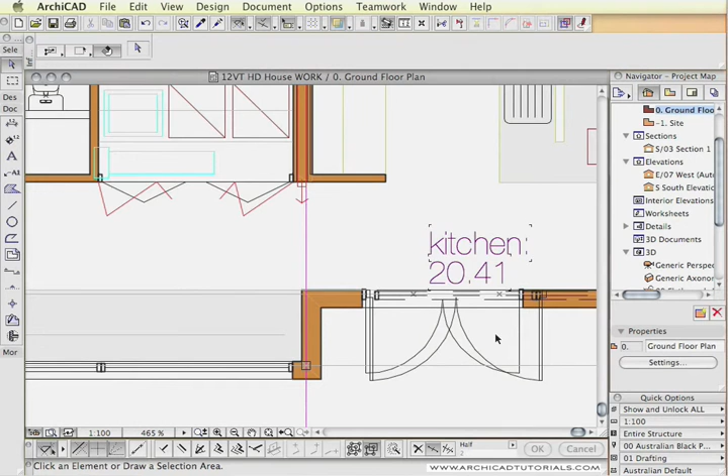Okay, well here we've got an ArchiCAD project with an AutoCAD XREF in it. It's the XREF that we looked at before, and by now we've done a little bit of ArchiCAD work done to it. Basically the walls have been traced with ArchiCAD walls, doors have been inserted, the plan's been rationalised a little bit, doors, windows, but it's not finished by no means. So I've got this sort of simple skeleton of a project.

Now we're basically going to have a look at a particular method you might employ to work with an XREF, because obviously you're not going to want to see your XREF all the time in our ArchiCAD project. So first thing we have to do is make sure that we can see the AutoCAD stuff easily and the ArchiCAD easily. So to do that we're going to go to the organizer and start playing around with the views, arranging things in terms of the display so it suits our methods of working.

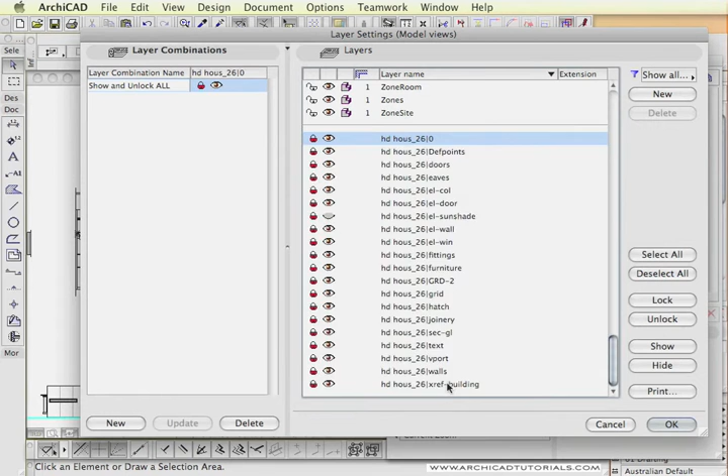So at this point I'm going to click on Control or Apple L and open the layers palette, and we're going to create a couple of new layer combinations. First of all, I'm going to select all the AutoCAD layers, which are pretty easily distinguished because they're underneath that line in the layers palette, and we can see that they are all AutoCAD layers, and there is another movie on this DVD that talks about this, so I'm not going to go over that.

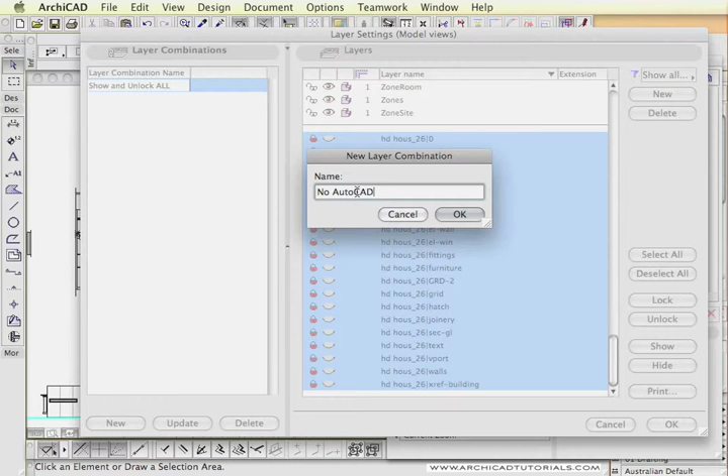And then I'm going to click on New and create the new layer combination, which is going to be called No AutoCAD. Now this is by no means a call to arms or anything, it's just a name. So now we can see that there is no AutoCAD overlay on our ArchiCAD plans there. Then I'm going to drag that view across to the right hand side and call it No Overlay.

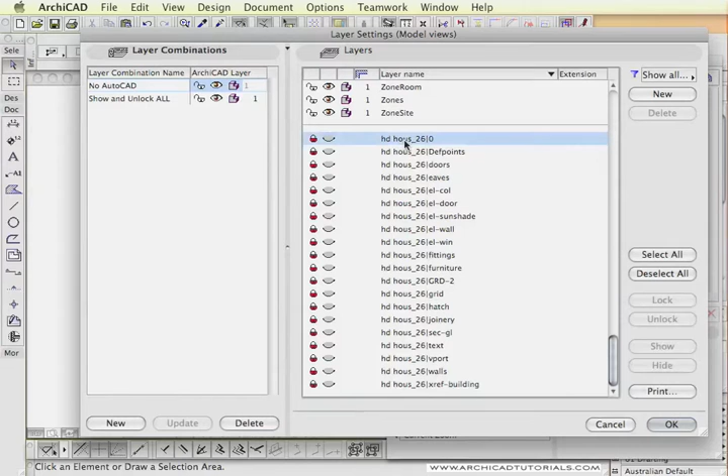Then I'm going to go back to the layers palette, and this time I'm going to do the opposite. I'm going to select all the AutoCAD layers. In fact, I'm just going to click on Show and Unlock All, and I'm going to select all the ArchiCAD layers, hide them, and create a new layer combination. And we're going to call this combination Overlay Only. So that's going to be just our AutoCAD layers showing, and I'm going to drag that view over to the right hand side again, and of course I'm going to call this Overlay Only.

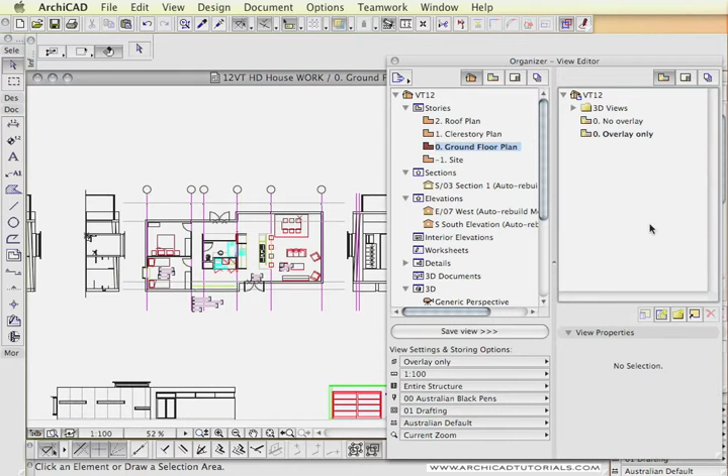Now obviously what this is going to allow us to do is toggle between the AutoCAD stuff and the ArchiCAD stuff. Now on top of that, what we can do is set the opposite view as an overlay or a trace reference. So by right mouse clicking on it, we can say choose as underlay, and then as you can see, we can see the underlay underneath our ArchiCAD project.

Now I'm going to open the trace and reference palette, and here I can change the colors there so we can see it a little bit better. Now you can see the AutoCAD stuff or the AutoCAD layers in orange, and that is there just as an overlay, so we can't select it accidentally, and the overlay can be changed considerably. We can choose different colors, it can be faded out, and we can also use the virtual tracing paper and pull a slider back, and then we can see the XREF underneath and peel back the ArchiCAD model to see how we're going.

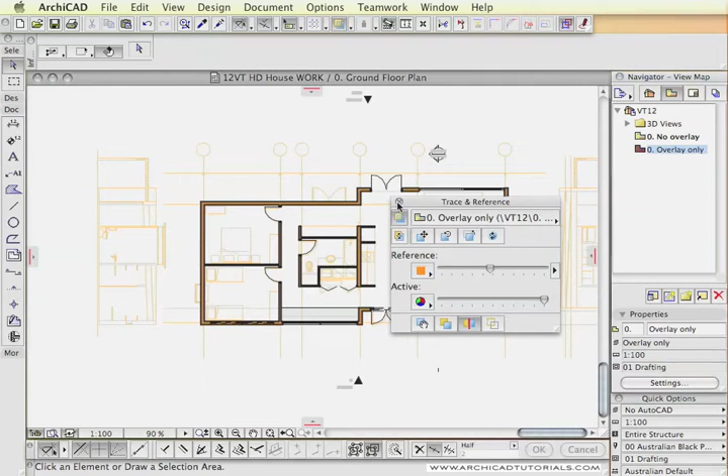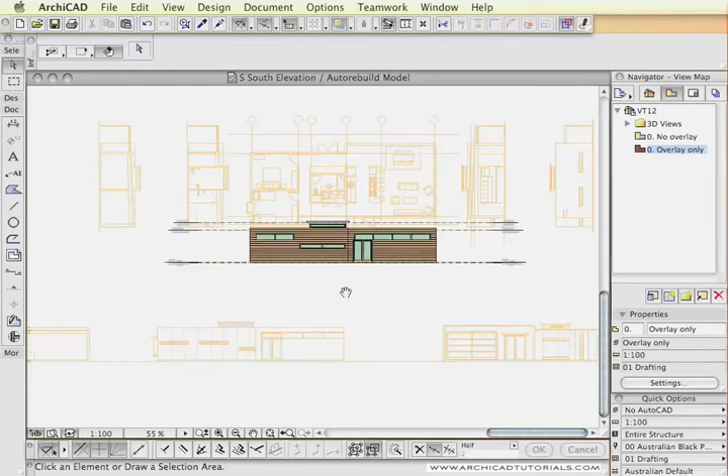In the same way, if I start working in one of the elevations, let's just say I open the south elevation, we can also choose the reference, or I could say define the view as overlay only, and we can show that as a trace reference. In this case we would probably try and line up the trace reference with our ArchiCAD project. So I'm just going to use the palette and select a hotspot and line it up with the hotspot on the ArchiCAD drawing, and there's our overlay.

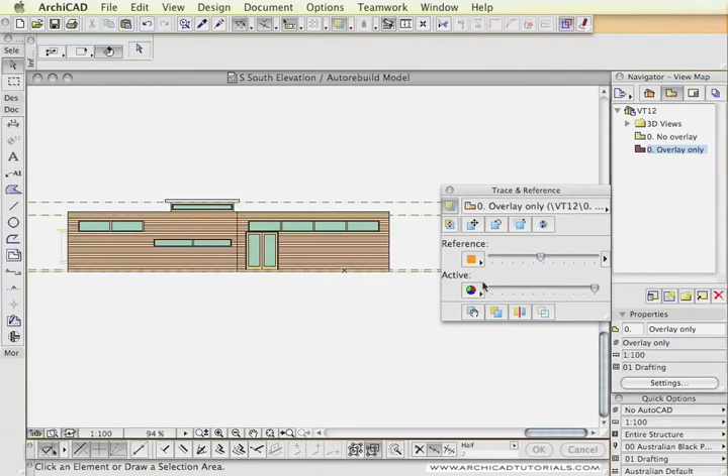And I might change the color a little bit here and bring the overlay on top. So once again we can see the differences that we've made and how well we're following the AutoCAD stuff. Now in each of these elevations the overlay sits in a different position, and also the rotation will be a little bit different as we move on to the side elevations of the building.

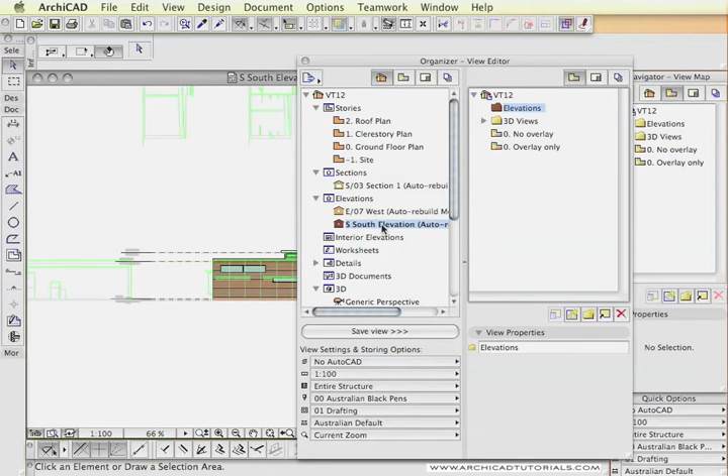We probably want to start saving those as views. So I'm going to open the organizer and I'm going to start saving those. So I'm going to click a new folder, call them elevations. Then I'm just going to drag that south elevation into the elevations folder.

It's important to remember that in our saved views on the right hand side of our organizer, it will actually remember everything about the view. So in this example we've got the elevation and the overlay set in front of the model and it's green, and when we click on the ground floor we can see the overlay is orange and behind it. These are all remembered in the view editor, and it certainly makes our job easier.

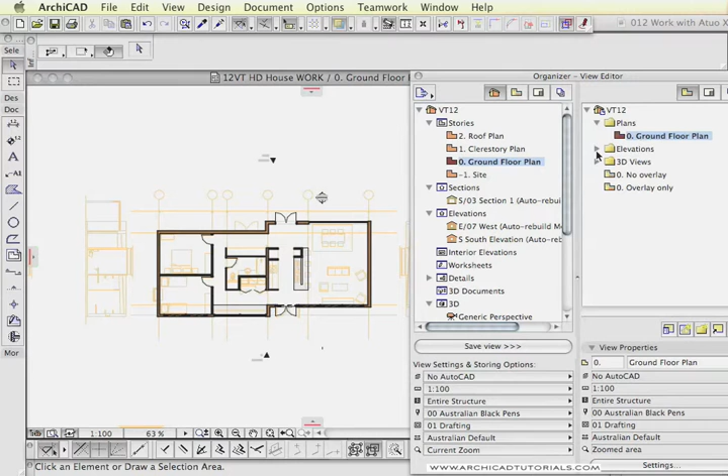I'm going to create another folder and call it plans, and drag that ground floor plan into there so it also remembers the settings for that ground floor view for later. Then as I click on this button I can turn the overlays on and off, so there's another option.

The next thing we're going to do is look at another elevation, because the elevation as it's brought in from AutoCAD is actually drawn all on one page, so all the elevations are along a straight line and some of them may be upside down. The elevations in this example are sideways, so we need to rotate the overlay so it lines up with our model.

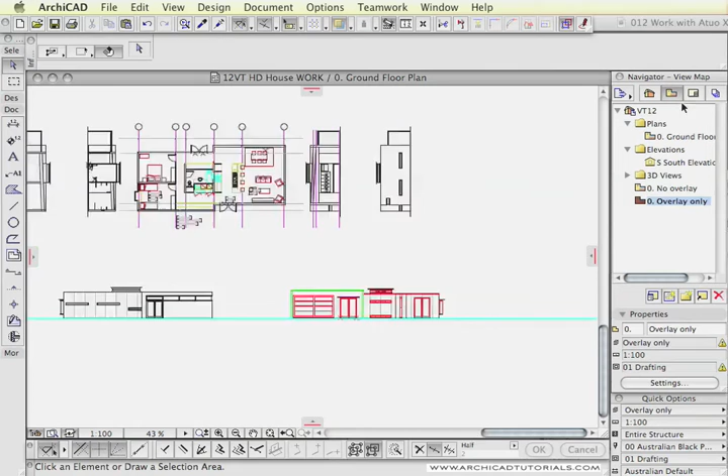Now we're going to go back to the navigator and choose a different elevation. I'm going to choose the west elevation, then go up to the saved views, click on the overlay only, right mouse click on it, and click show trace reference. Now that the overlay is showing underneath, we can see how it's oriented incorrectly and we need to fix that up.

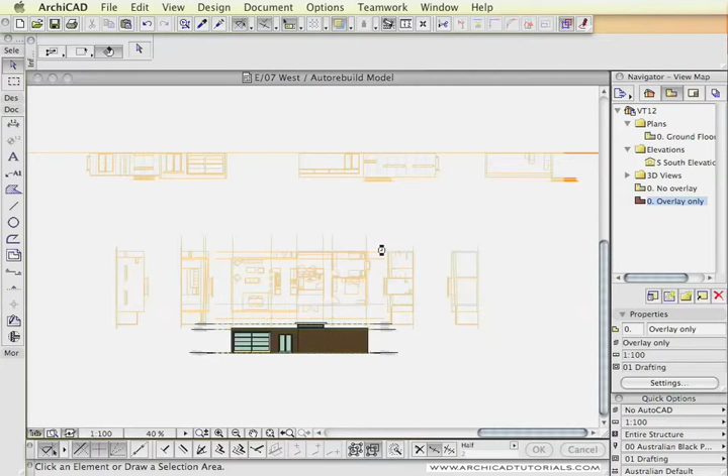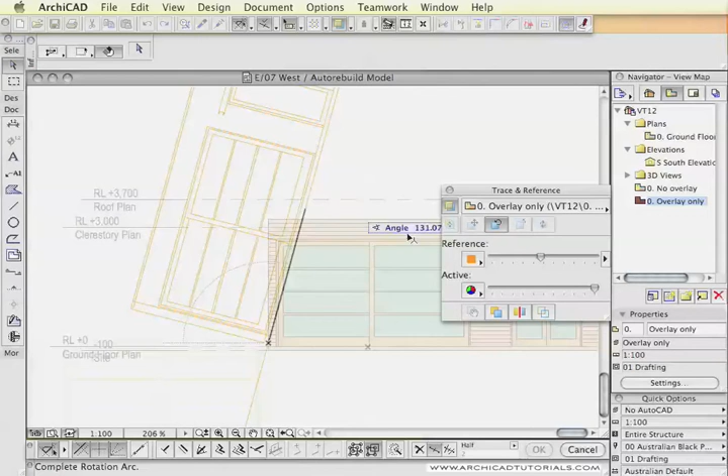To rotate it, go up to the trace reference palette, open it up, and check this icon here. I'm going to drag it to the right point first, in other words line it up with the bottom of our model, and then I need to rotate it. Click on this icon, zoom back in, select it, hold the shift key down, rotate it around 90 degrees holding shift, and then I just need to move it a little bit more.

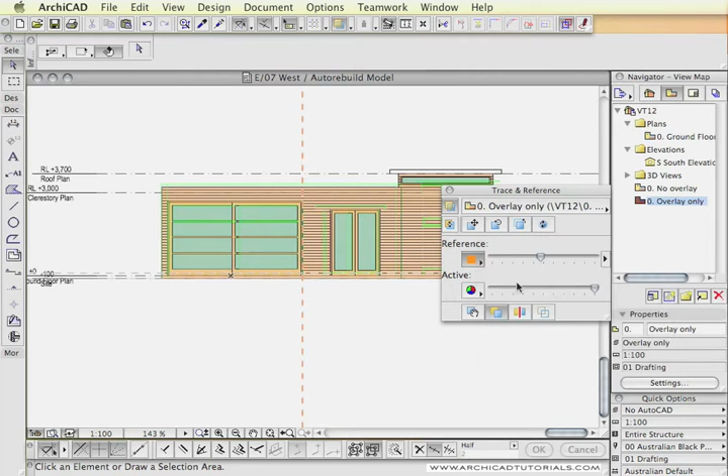Click on that, line it up. When it ticks there, I can click again and it should be in the right spot. Then again I'm going to change the position of the overlay by checking this button, and change the color of it once again, make it green, and increase the intensity so it's in front. So once again it's easy to see how far our model is different from the AutoCAD XREF.

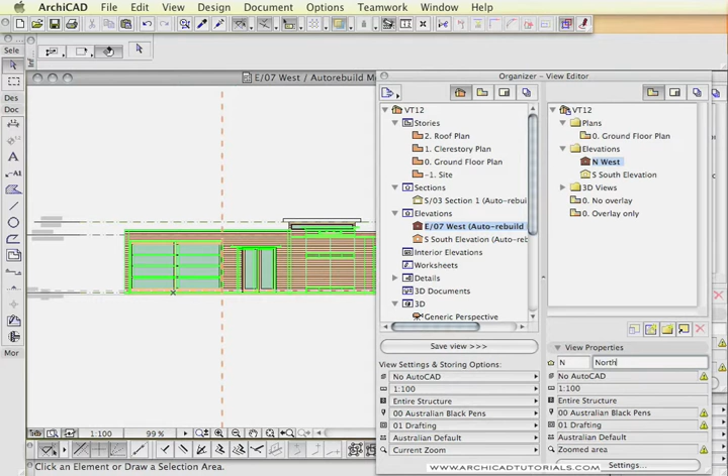Once again I'm going to save that view by dragging it over into our elevations folder, and I'm going to call this the north elevation. Now this elevation obviously has a fair bit of work to do on it, but at least we know how to work with it.

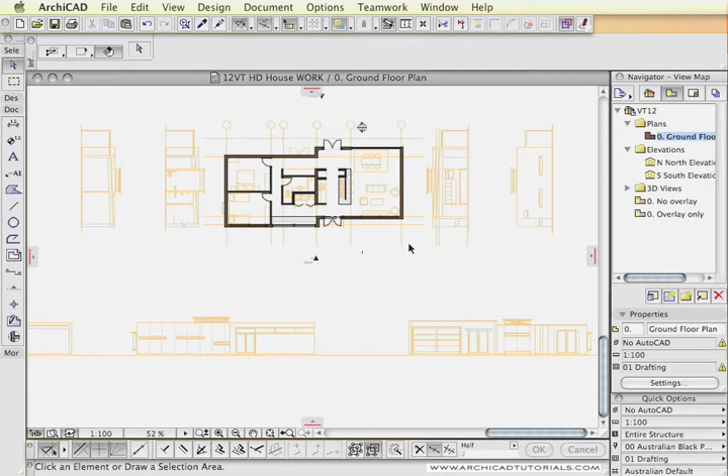In this manner we can keep working with our XREFs without having to do anything to the AutoCAD drawing itself. So once the work is done in ArchiCAD, what we're going to do is set it up in the layouts and look at sending those drawings back to AutoCAD.

We've done a little bit of work on this ArchiCAD project, tracing all the AutoCAD XREFs, and I've created a layout, several layouts in fact, for the different levels in the building, as well as one A3 layout for the elevations. What I'm going to do now is export them back to AutoCAD.

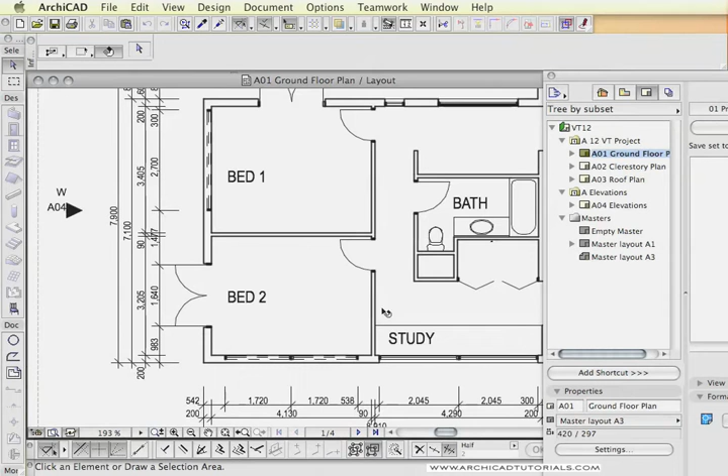What's quite important to make it easier for the AutoCAD users to deal with ArchiCAD drawings is to set up the display options so there are no fills in the drawing, in the floor plan or the elevations. At this moment we're not showing any fills in the walls, so I'm sending back just a plain line drawing, and the same for the elevations - no fills or hatches. It just makes it a little bit easier for the people in AutoCAD.

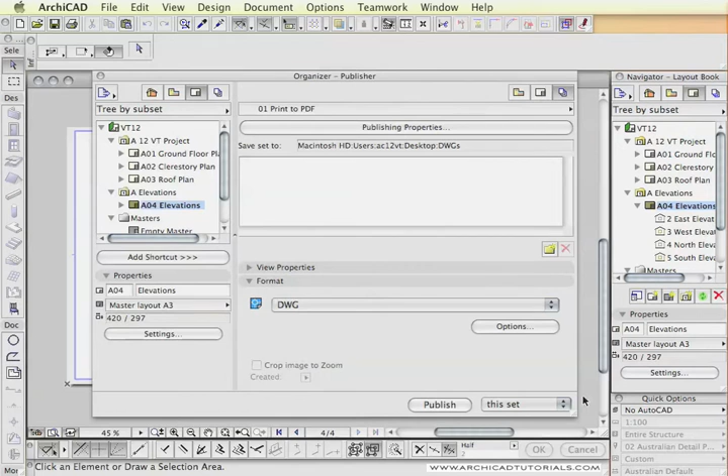I'm just going to work from inside the organizer. I'm going to pick the subsets that I want to export and drag those over to here, put them into my publisher window, and for both of those I'll need to set up the publishing properties, which is basically where it will be saved to. So I'm going to save them to my desktop at this stage.

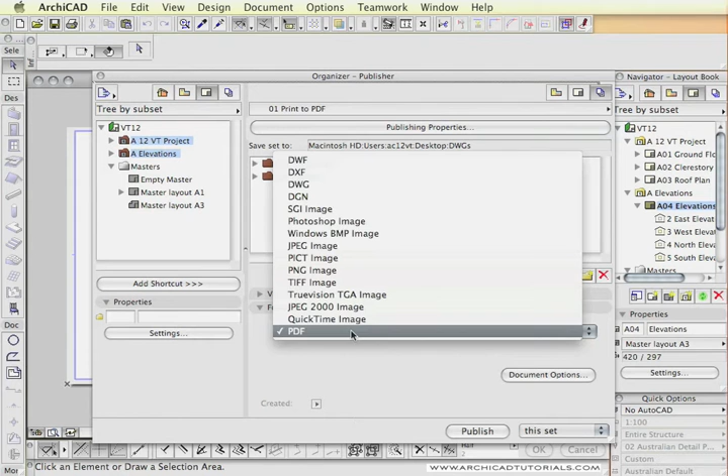I also want to set up the format, which is obviously going to be DWG. Before we hit publish, let's have a look at the format and the options for export. This window is quite similar to the dialog or translator that brings AutoCAD drawings into ArchiCAD.

Just quickly, we're going to have a look at the most important things. The drawing units will be 1mm. Save options has a few things we're going to look at, including the file format, where you choose the version of AutoCAD you want to export to.

If there are any images within our layout, we're just going to export those in the original format, which would probably be JPEG or something like that. We don't want to include any temporary files.

When it comes to saving the layouts, we have a choice of saving as paper space with drawings as blocks - in this case our elevations and floor plans inserted as blocks, which is probably not the best option. Paper space with cropped views content is paper space with viewport zoomed to the extent of each of the elevations and floor plan. Paper space with full views content means the drawing would have a paper space set up with all the elevations sitting in one viewport. And model space is dumping all the drawings as model space. I'm actually going to use paper space with cropped views.

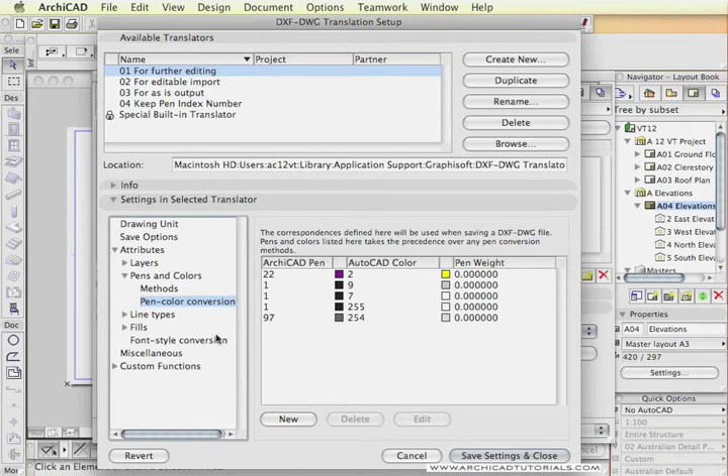Then under attributes, there are the typical settings we quickly had a look at before: conversion of layer names, pens and colors. There is a general method where you can convert ArchiCAD pens to AutoCAD colors by setting the best matching standard AutoCAD color, which is probably best, rather than RGB color. Pen color conversions work in exactly the same way as before, but in reverse - so now anything that's pen 22 will go to AutoCAD as a yellow pen. Line type's the same.

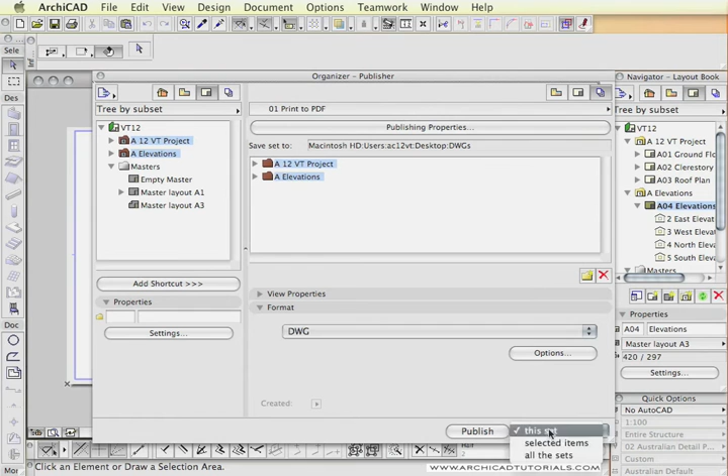That's really basically it. There are several other settings here where you can set up more accurate configurations, but this is usually quite acceptable. I'm going to save and close, and then once all those settings are done, we can say publish this set or the selected items, push the publish button, and now it's saving our AutoCAD drawings.

That's basically it. Now we're going to open AutoCAD, and open the drawings that we exported from ArchiCAD in AutoCAD and have a look at what they look like. So I'm just going to go File, Open. I'm going to start with the ground floor plan.

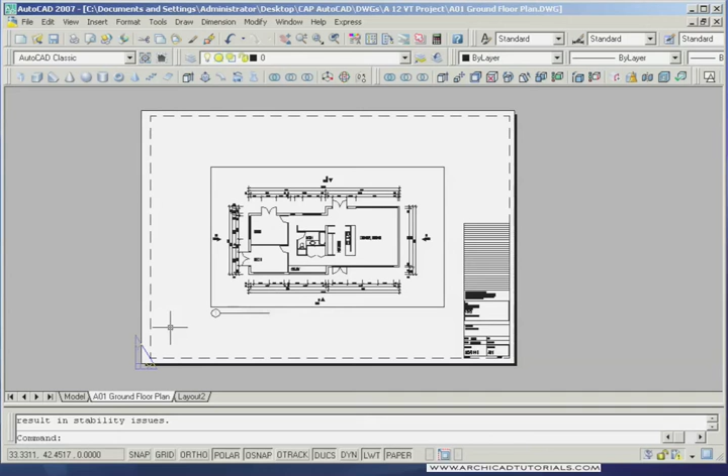Then you get a warning that this drawing hasn't been created by AutoCAD. You just click Continue. And because we've set the export to paper space with a crop view, this is our A3 paper space. The title block comes through without a problem. We have a viewport in the middle of the space, and inside the viewport we have our floor plan scaled at 1:100.

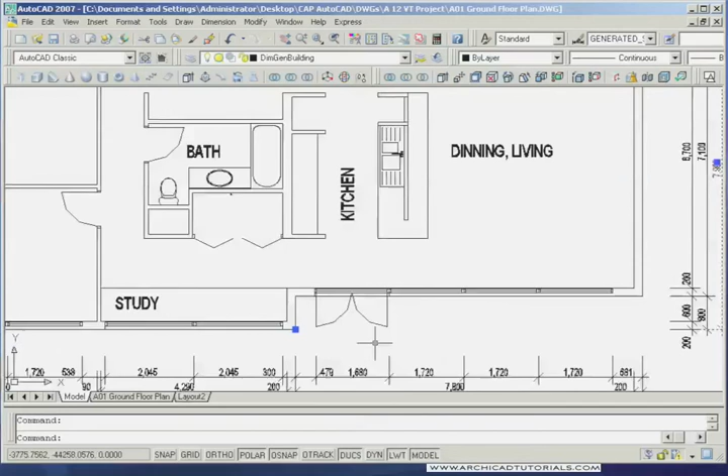If we click on the model space, what you can see is the actual floor plan. All the dimensions have come through correctly. They are still associated with the objects from which they were initially created, so they actually update. The text has been replaced by the SHX fonts that AutoCAD has.

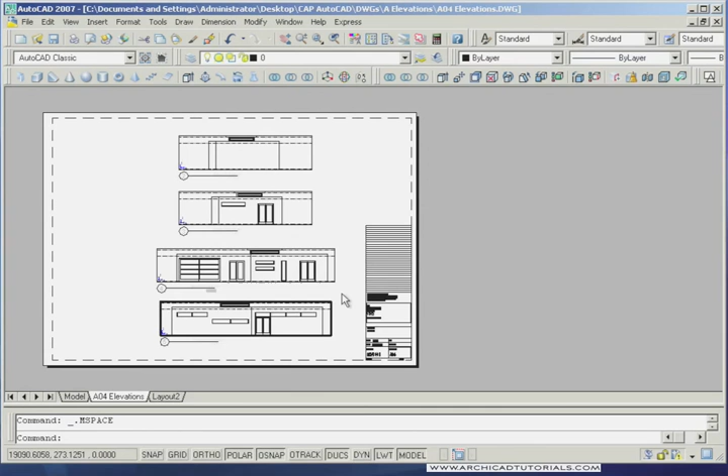I'll just open the elevations as well, because what happens with elevations is that you get the A3 layout, you get the viewports with all the elevations inside them, zoomed to the correct scale, 1:100. The titles have come through, and in model space you simply get the row of elevations, just like you'd expect as normally drawn in AutoCAD.

All the layers have come through, and you also notice that all the drawings came through in one colour, in black. That's only because we've set our export from ArchiCAD as all the drawings in the layout were actually just black line work.